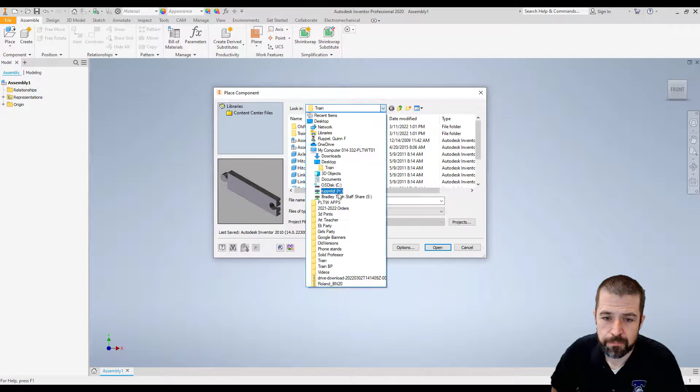On the top left corner here it says Place. I'm going to locate my parts. Yours will be in your PLTWX drive. Mine are located in a Birdhouse folder. Alright, so here I've got my pieces. I'm going to start by clicking on a piece and placing it out there. Go place, find another piece, open it, and click it out there. If I needed more, I could certainly click more times. There's my side.

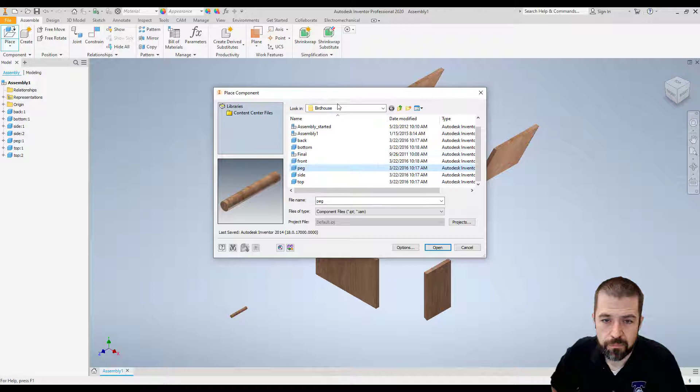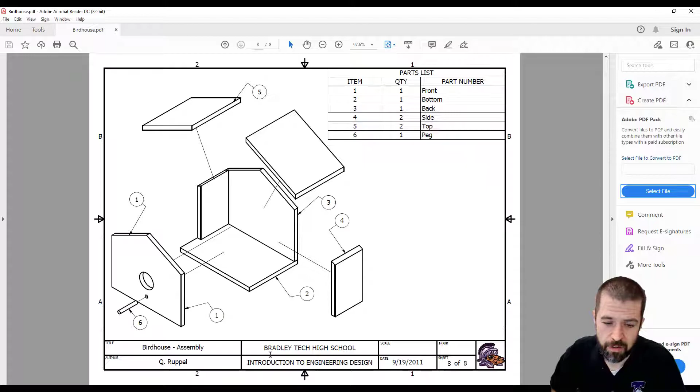There are all my pieces. The first thing I want to do is turn this upright. I've got my blueprints opened up here, and there's the original. There's my bottom, and so the bottom needs to be flat. Inside of here, we've got a couple options to rotate it.

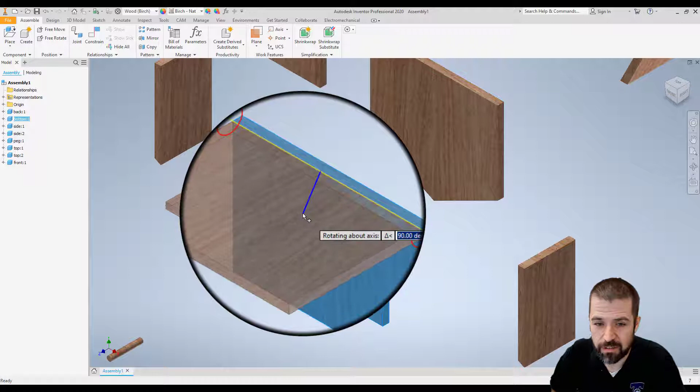The main one is that we do position, grip, snap. You're going to grab this edge, and this option here will say rotate about that line. That'll allow you to bring it up. You want to only move at 90, 180, and 270, 90-degree increments.

So there's my 90, I'm going to click, right click, OK. I need to be sure that one piece does not move. I will then lock this in place and bring everything else to that. So I'm going to click on that bottom, right click, and go to grounded. Now you notice that one has a pin, meaning this one cannot move, but everything else can.

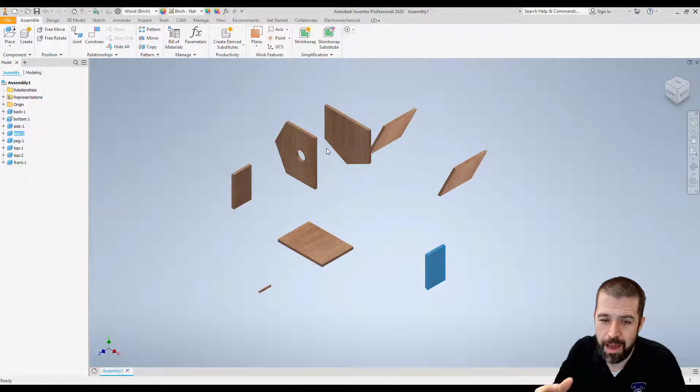First thing I'm going to do is lock my back to my bottom. To do that, I'm going to use constraint. The only two options you're going to switch between are mate and flush. Mate will line up or touch two surfaces, and flush will line surfaces up. So I want this surface, notice I'm grabbing the whole surface, to touch this surface, and hit apply.

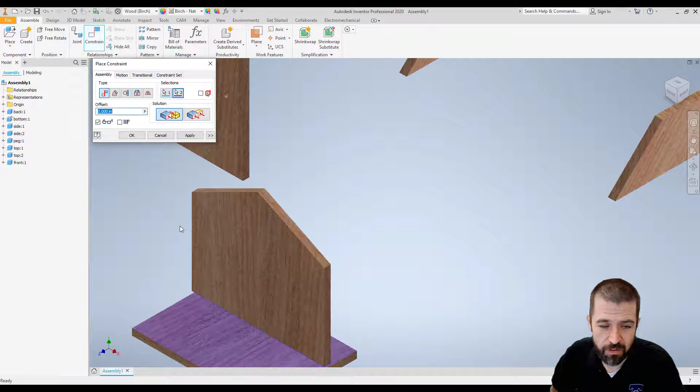You'll notice that it did switch there for me. Alright, it'll still move until I add this flush constraint, grabbing this surface with this surface, and hit apply. Now it moves along that edge, rotates my back. I'm going to constraint, flush the back to the back, and hit apply.

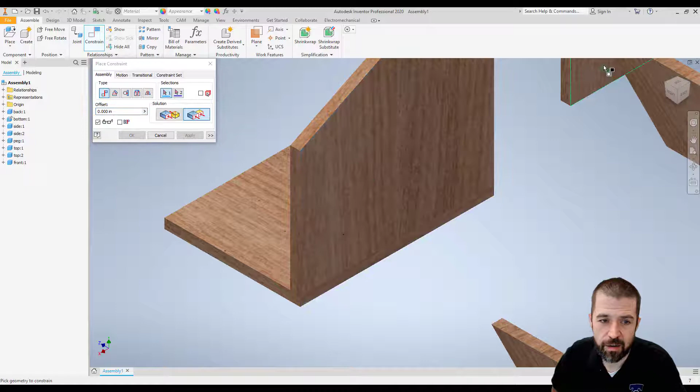Alright, next up I'm going to put these sides in place. First thing I'm going to do again is grab my whole surface, the bottom. I'm going to do a mate constraint off the bottom, not an edge, the whole surface, and lock that to the top of my bottom piece. Again, you'll notice that it flipped for me.

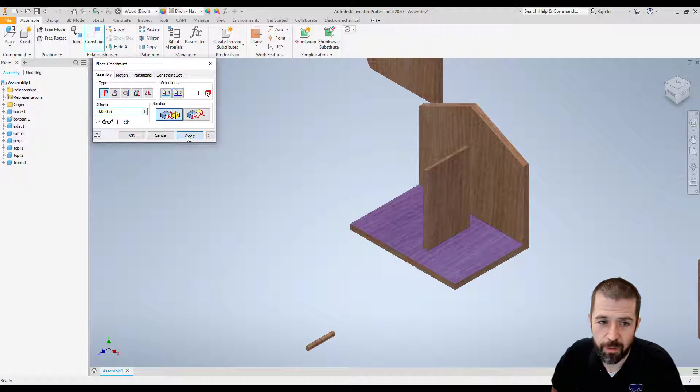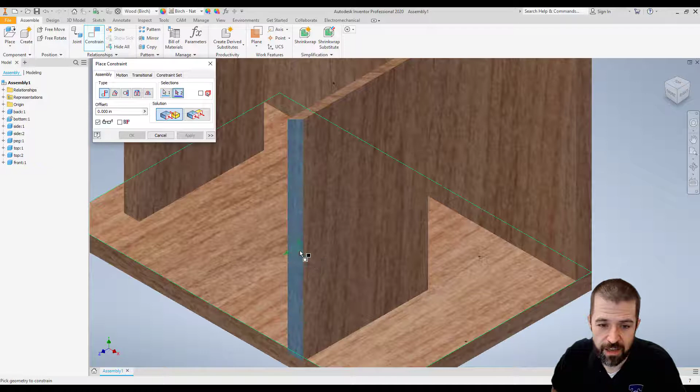Alright, so this can go over here. I'm going to place my other one as well. There's my bottom, it needs to touch this surface. Hit apply. You'll notice that this one is backwards, right? These edges are not going to match up. So what I can do is simply constrain this side to here, and it flipped for me, and hit apply.

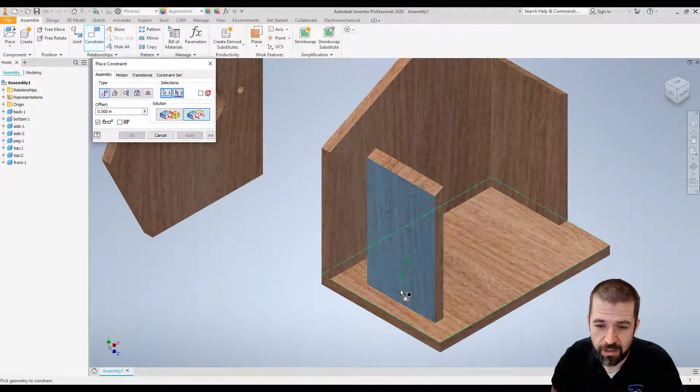This piece will slide along that inside edge. I'm going to do constraint, flush, and grab this side with this side, and it brings it tight into that corner. I'm going to do the same on the other side, this surface with this surface. Hit apply, and then I will mate constraint this surface.

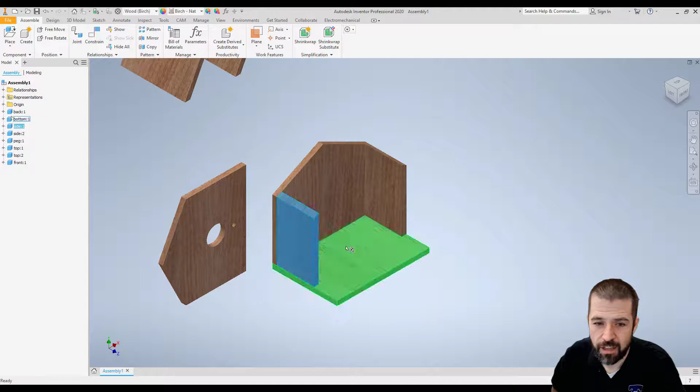Right, mate is touching two surfaces. Let me move this out of the way. Constraint mate this surface with this surface. Hit apply. And so now because this one is locked in, these pieces cannot move.

Next up, my front constraint. Take the bottom of my front. Again, I'm grabbing the face, this whole surface, not the edge. This face, and touch it to there. Hit apply.

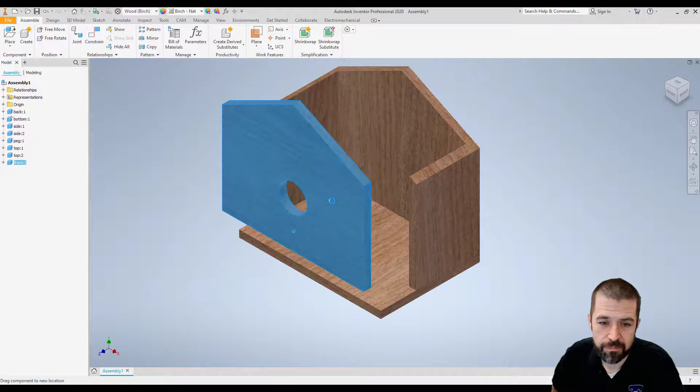Constraint, flush this side with this edge, hit apply, and then mate this whole surface with the back side of my front. Now none of this can move.

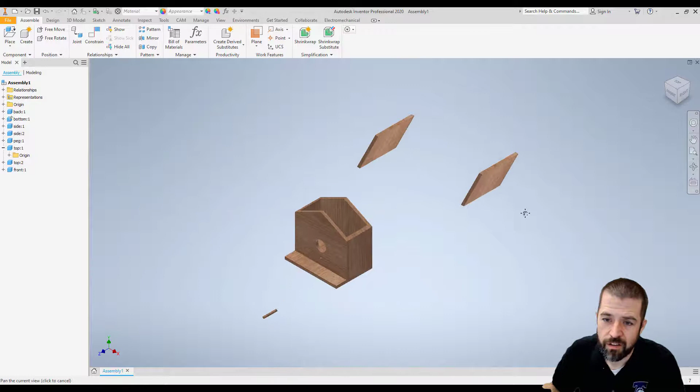Alright, so now let's look at the top. I'm going to use constraint. I want this surface to touch this surface. You could have grabbed any one of those and apply. And I'm going to flush back with the back and apply.

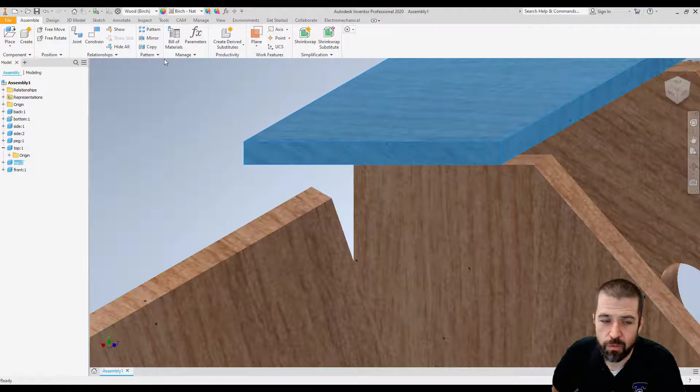And notice that right now this will move. This is the one time where you're going to use that edge constraint. I want this edge to touch this edge. And it brings it tight to that corner.

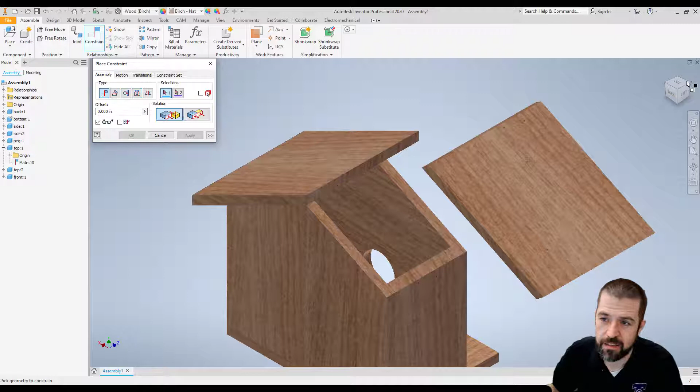Alright, so now let's look at the other side. I'm going to constraint this surface to this surface. Hit apply. You'll notice that it is still backwards though. I'm going to constraint, mate, or flush this front with the back. When I do this, you'll see that it flipped over.

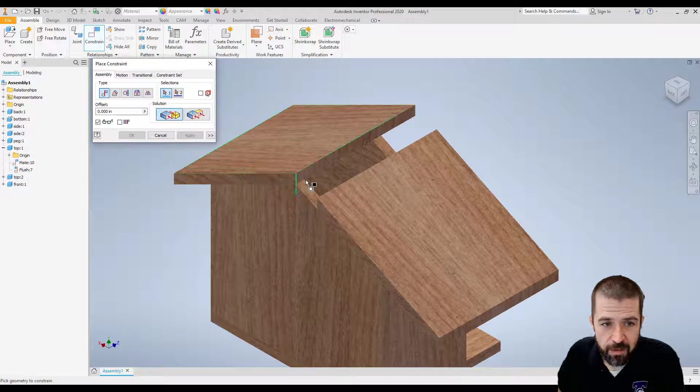Right? I'm telling it what surfaces I want to align up. By doing that, it'll rotate things for me. Then I'll take and mate, again, this one edge with this one edge and hit apply. Look at it from the front, it's coming together.

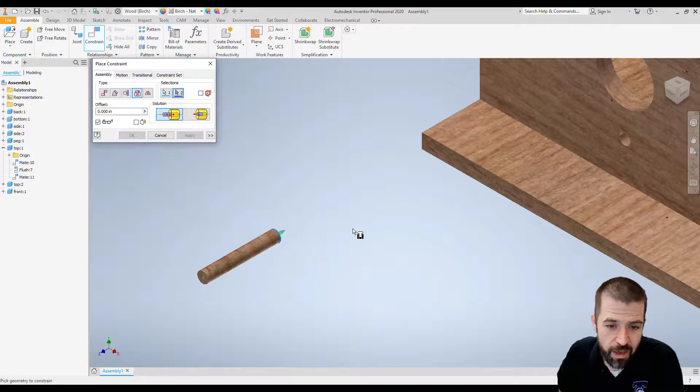Last thing then I'll do is constrain insert. You'll notice the object here is a round object into a hole. So I'm going to insert this peg into the inside hole, not this surface, but this hole. It does not appear, but if I switch it and hit apply, now it's locked in place.

And there is the assembly of the Birdhouse project. Thank you.